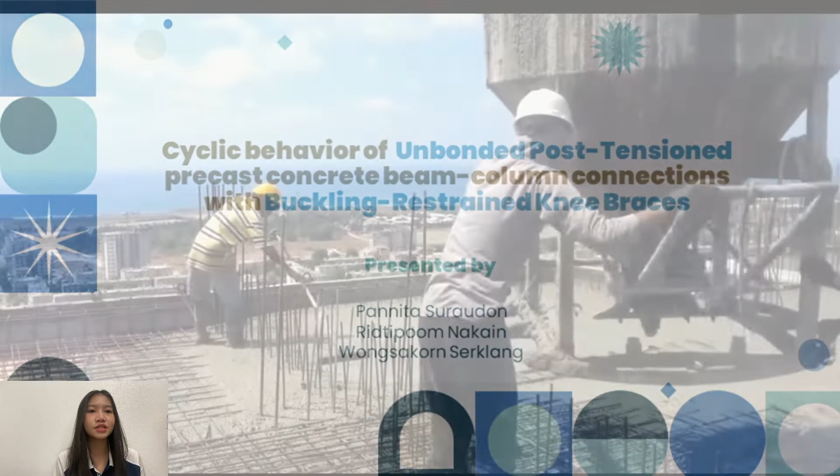In the past, most construction used cast-in-place concrete, which had problems in quality, time, and used a lot of formwork. Precast concrete can solve the problems of cast-in-place in terms of great quality and faster construction. However, precast concrete is not suitable for earthquakes due to the weak joint.

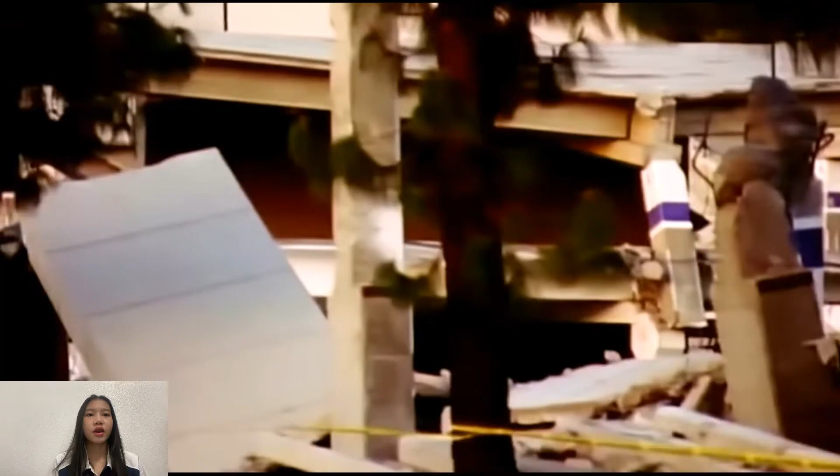According to the 1994 Northridge earthquake, most precast concrete structures collapsed. Therefore, precast structures would not be allowed unless the performance is proved and verified.

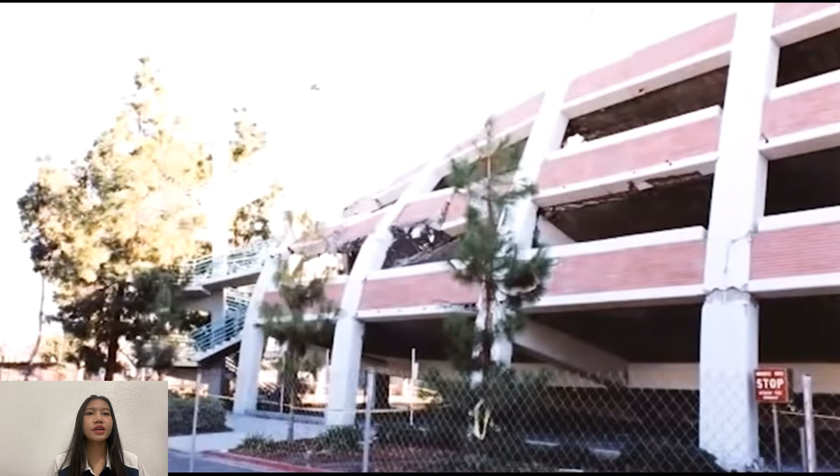After that, researchers studied and improved the joint of precast systems, which can be divided into main systems. First is monolithic, which attempts to emulate cast-in-place structure by casting concrete at the joint, which can dissipate energy well but causes crack or failure in the connection.

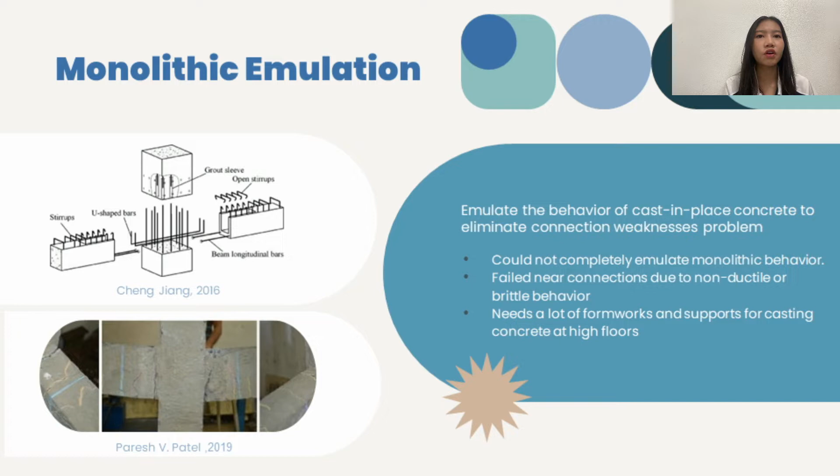To avoid damage of beam column connection, jointed precast is developed, which can limit damage to the contact area of the prefabricated part. Therefore, hybrid frame will be used in this study that has pre-stressed tendon to help self-centering, moment resistance, and shear resistance, combined with mild steel reinforcement which helps energy dissipation.

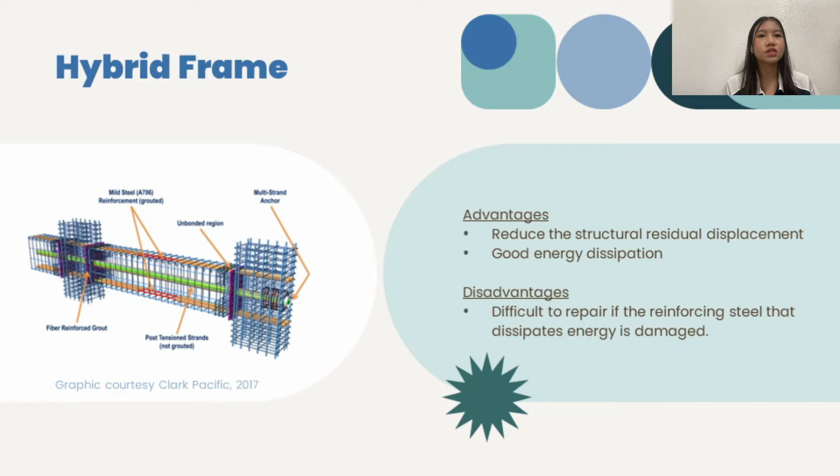However, after an earthquake occurs, the reinforcement is damaged and hard to repair. Therefore, to replace and repair easily, our study will convert the energy dissipator by changing internal reinforcement into external bracing.

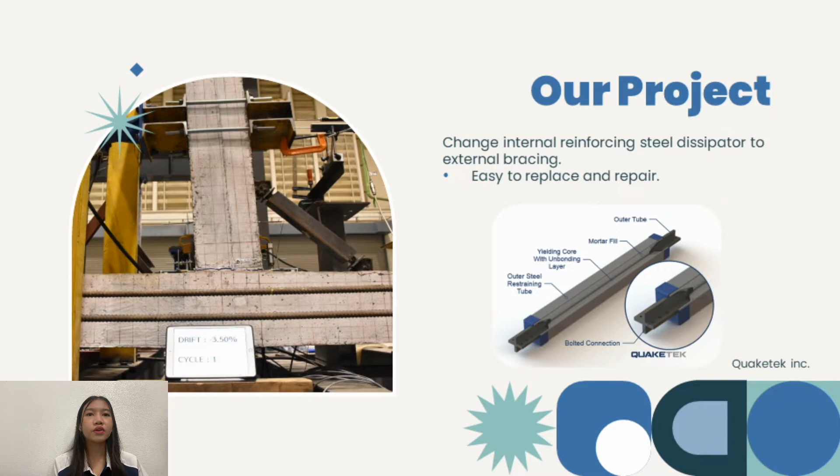Using buckling restrained brace, or BRB, to dissipate energy, the steel core can prevent buckling. Moreover, unbond material that wraps around the steel core can resist tensile and compressive force.

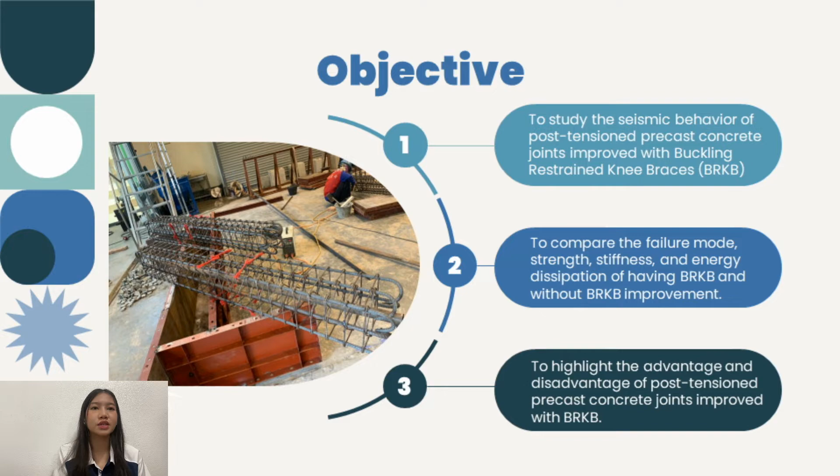This study has the objective to study the seismic behavior of post-tension precast concrete joint improved with buckling restrained knee brace, or BRKB. Second, to compare the failure mode, strength, stiffness, and energy dissipation of having BRB and without BRB improvement. Lastly, to highlight the advantages and disadvantages of post-tension precast concrete joint improved with BRB.

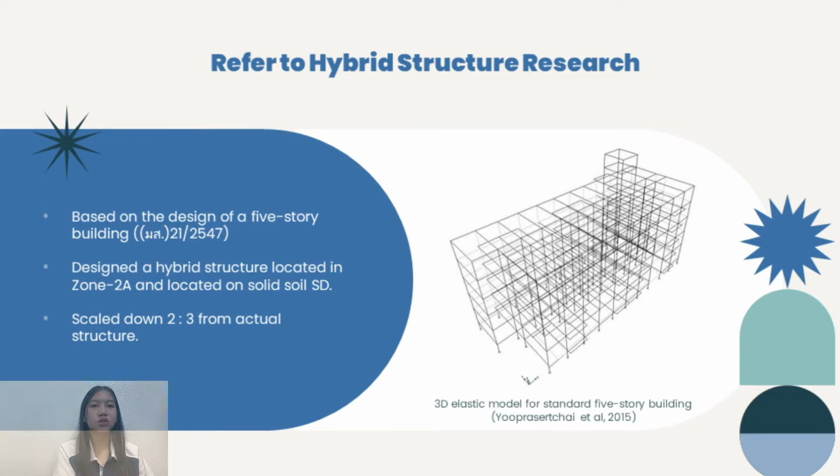Our study is based on the design of a 5-story building in hybrid structure, scaled down to two-thirds from the actual structure. Next is the design concept, designing hysteretic behavior of post-tension tendon for self-centering, as shown in the bilinear elastic graph.

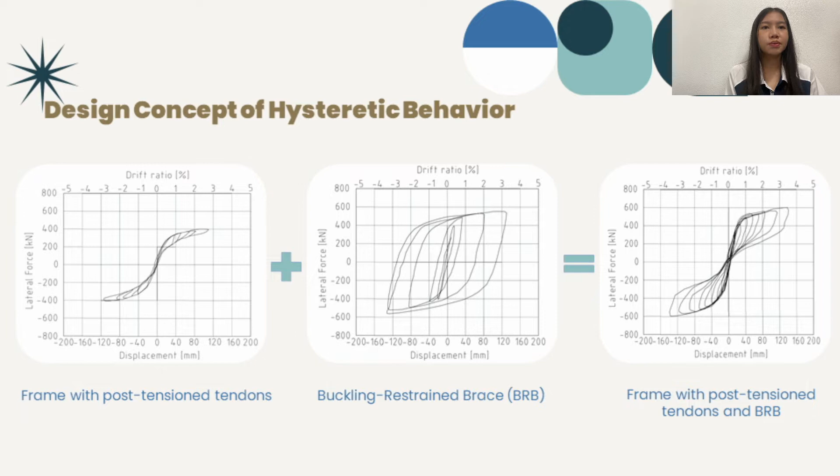Design of BRB to dissipate energy is shown as fat loops, and the combination of post-tension and BRB shows flag-shaped hysteretic loops that perform the best seismic performance.

We design the structure using capacity design. First, the flexural strength at the hybrid connection must be large enough to withstand lateral forces from the earthquake. Second, the rotational resistance capability of the hybrid connection must be sufficient.

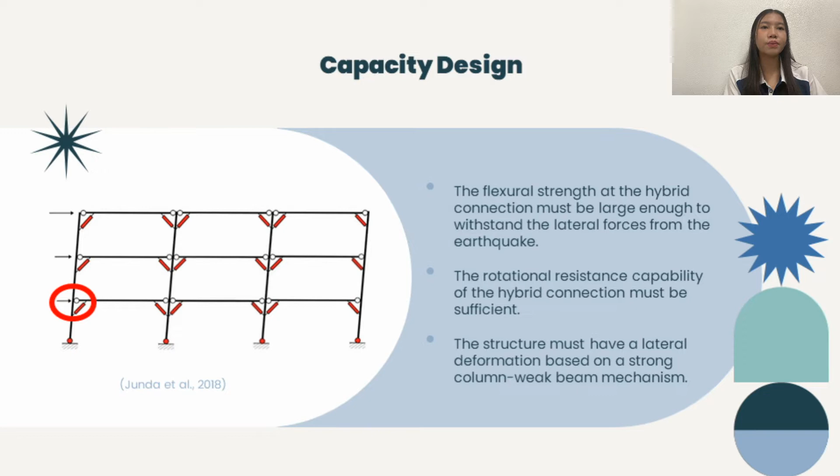Lastly, the structure must have lateral deformation based on a strong column weak beam mechanism. After that, the prestressed tendon should be designed in the elastic zone for self-centering even with no lateral load. The prestressed tendon will be designed to be capable of shear force and factored load.

Our study places the prestressed tendon at the top and bottom to increase moment arm, which increases flexural strength of the structure, while designing BRB at a point in the inelastic zone to dissipate energy.

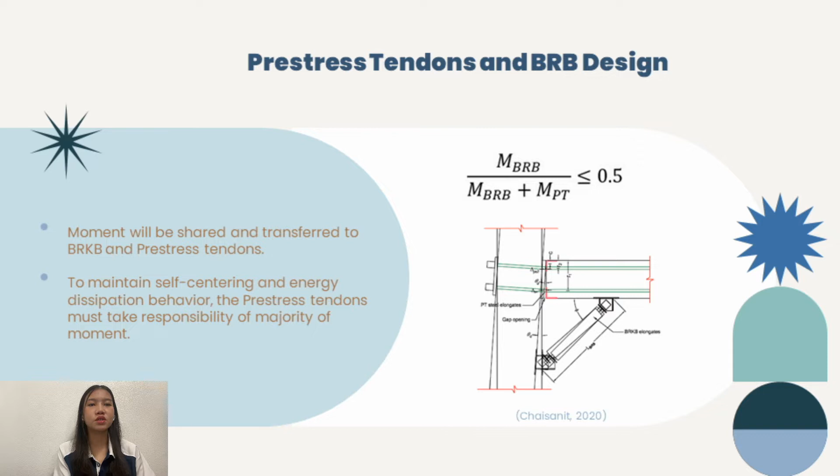The moment will be shared and transferred to BRB and prestressed tendon. Using the moment of BRB divided by total moment of BRB and prestressed tendon, this ratio must equal or be lower than 0.5 to ensure self-centering and energy dissipation, with the suitable value being equal to 0.3.

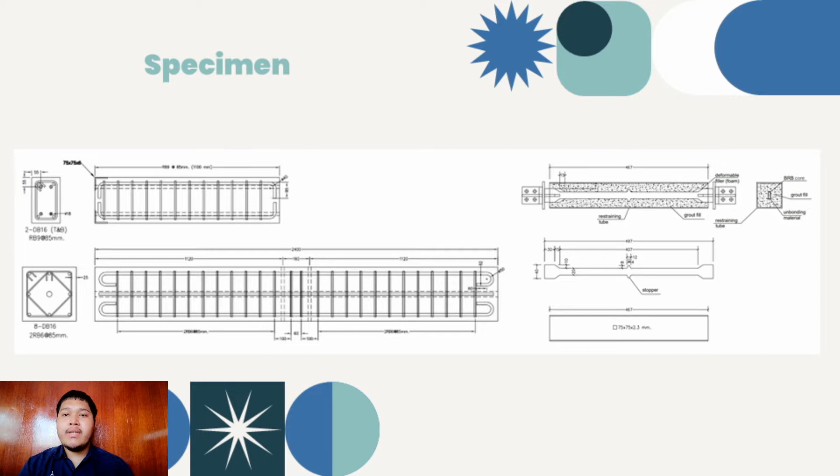For methodology, we make specimens by cutting the external joint section of the real structure we observed and scaling it down to two-thirds. There are three important parts, including the beam, column, and bracing BRB.

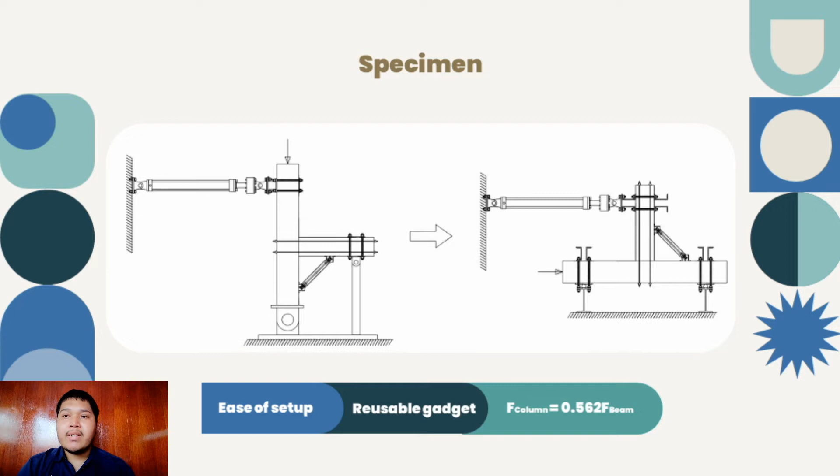The column force will equal the beam force multiplied by a factor of 0.562. For our experiment, we will compare between two specimens.

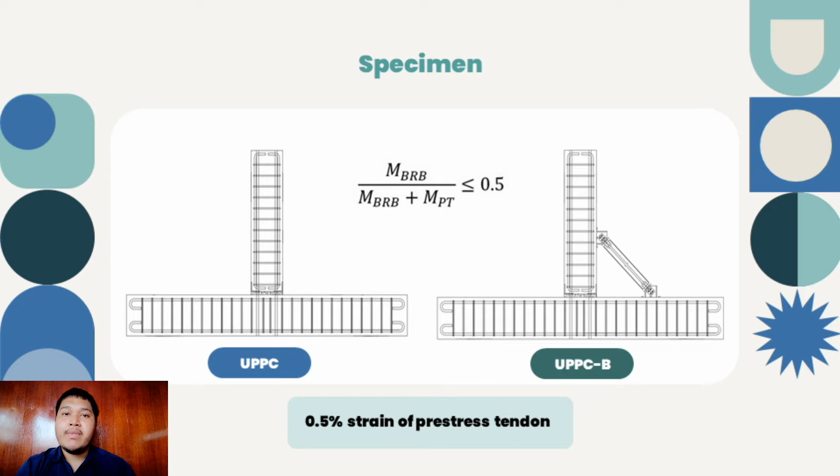It has the same detail as UPPC, but with added bracing BRB, and the tendons are put with a force of 0.5% strain, and the BRB moment over total moment will equal 0.5.

After completing the experimental design, the samples were installed in preparation for the test, setting it up with pivotal load by hydraulic jack at the end of the column, with a steel frame to prevent torsion on the beam.

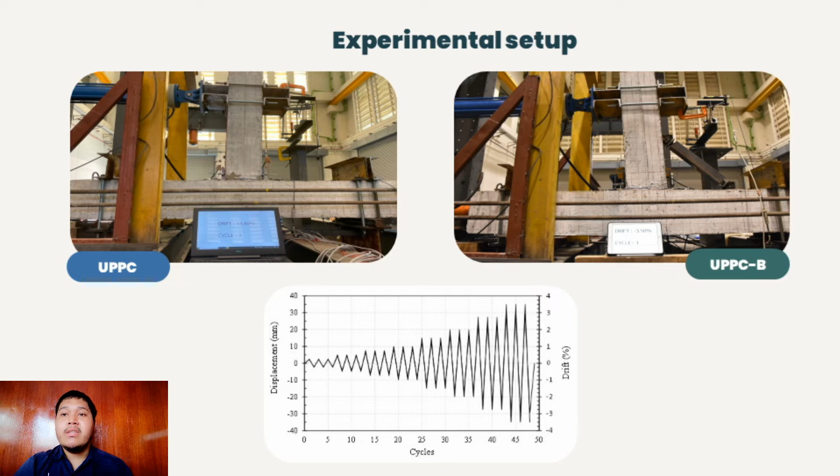Start testing by applying load at various story drifts, from 0.25% both forward and backward for 3 cycles, gradually increasing to 3.5% for 3 cycles, the same for every story drift and every specimen.

For the result of this experiment, first consider the hysteretic graph of both specimens. UPPC will show the advantage of self-centering when receiving cyclic load, and UPPC-B will show the advantage of good energy dissipation more than the other specimen.

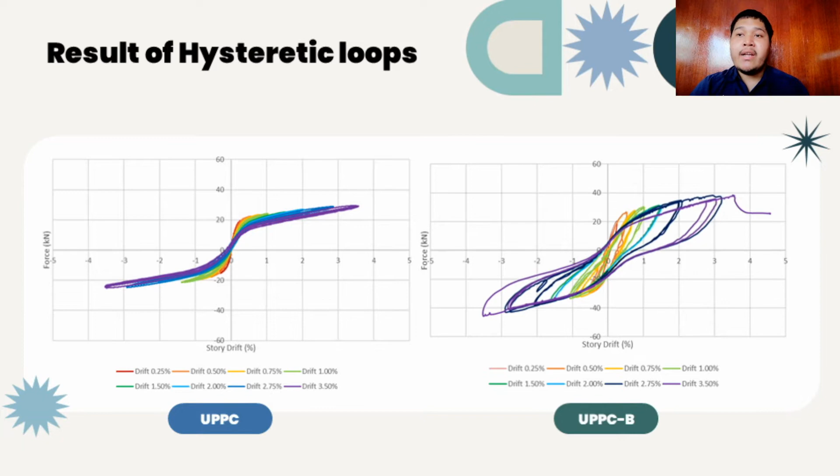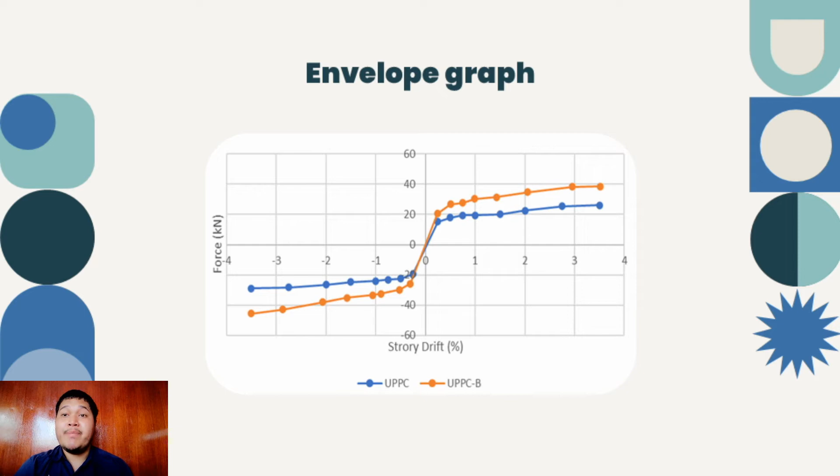Next is the envelope graph, which shows the maximum force of the two specimens and compares them. You will see at the same story drift UPPC-B can get more force, and the UPPC-B graph had a slope greater than the UPPC specimen, representing greater stiffness.

For the criteria used to ensure the performance of the frame, specimen UPPC was used as acceptance criteria for moment frames, ACI 374.1, which uses the parameters shown in the slide. When calculating the limit on real drift ratio, the value is 3.6%, so 3.5% was selected to compare to the acceptance criteria.

For specimen UPPC-B, the design of BRB is not yet governed by any building code, so the design to test the frame with BRB was based on the recommended provisions published in FEMA 450, which was used as a reference in this study, using a design story drift of 2%.

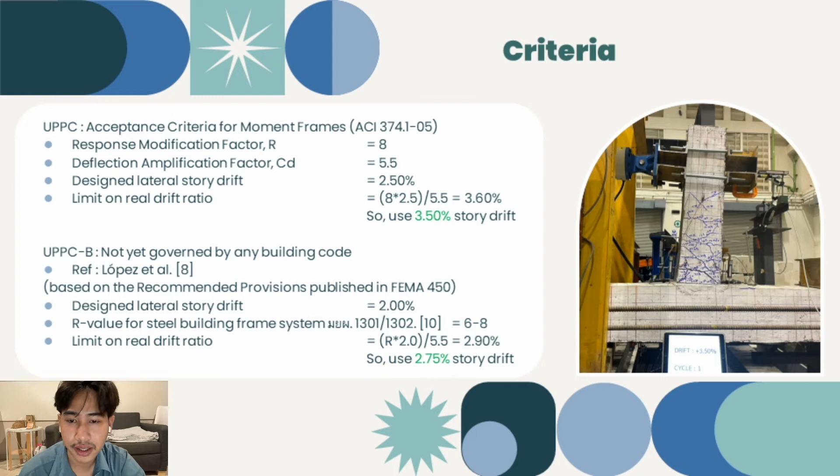When calculating the limit on real drift ratio using the R value between 6 and 8, referring to the มยผ. standard for steel building frame systems, the value is in the range of 2.18% to 2.9%. So 2.75% drift is the reasonable value to compare to the acceptance criteria.

This line graph shows the stiffness degradation for both specimens. The normalized secant stiffness is used to compare to the acceptance criteria, which states that the normalized secant stiffness shall not be less than 5%.

For the specimen UPPC, or the specimen without BRB, the normalized secant stiffness at the 3.5% story drift was 25.6%, while the specimen UPPC-B was 18.8% at 2.75% drift. It means that both specimens perform acceptable stiffness degradation.

Although the specimen UPPC performed a better ability to withstand the degradation of stiffness than specimen UPPC-B, the energy dissipation also needs to be confirmed in order to ensure the performance of seismic resistance.

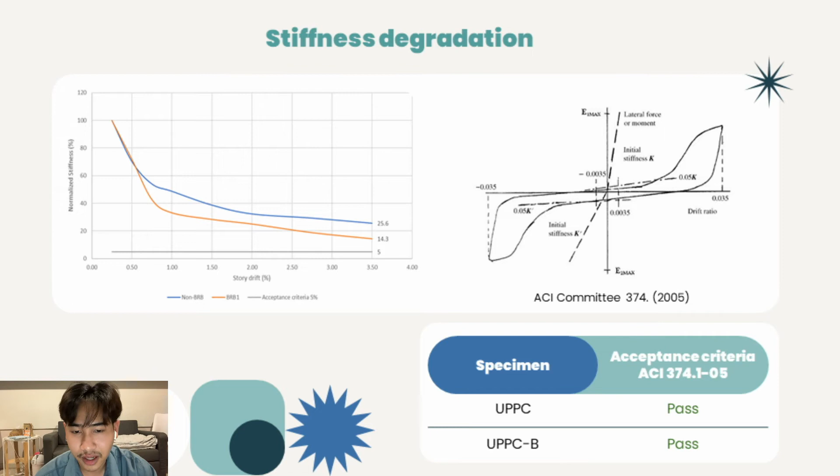For the energy dissipation, in order to check whether the behavior of energy dissipation for both specimens will pass the acceptance criteria or not, the relative energy dissipation ratio was calculated and plotted.

The relative energy dissipation ratio has to perform above 12.5% according to the acceptance criteria, but specimen UPPC was only 2.25%, while specimen UPPC-B performed 21.6%. It is clearly shown that the energy dissipation behavior of specimen UPPC did not satisfy the acceptance criteria, while specimen UPPC-B was satisfied.

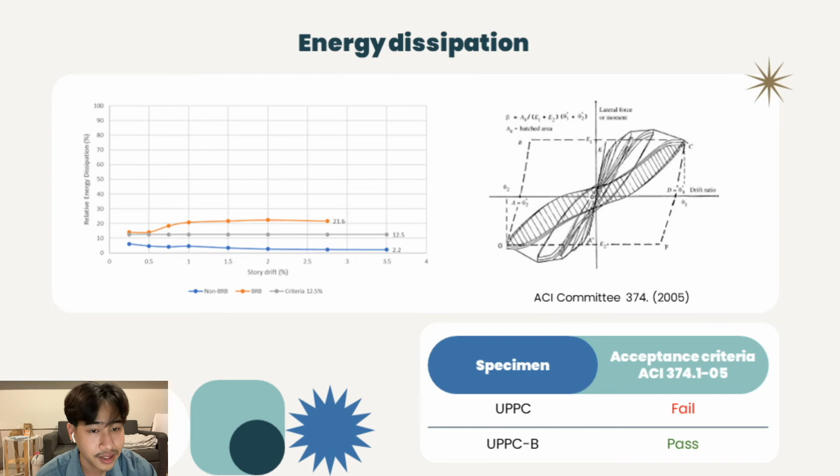Next is to ensure that the experimental results are following the assumptions or not. The first assumption says that the connection deforms as rigid bodies, or deforms only at the beam column interface.

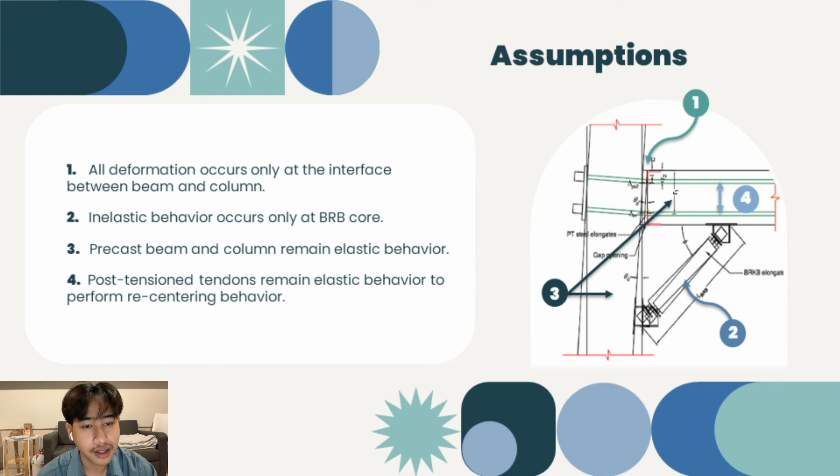Second is that the inelastic behavior occurs only at the BRB core, which means that the precast beam and column, including post-tension tendons, should remain elastic behavior, shown in numbers 3 and 4.

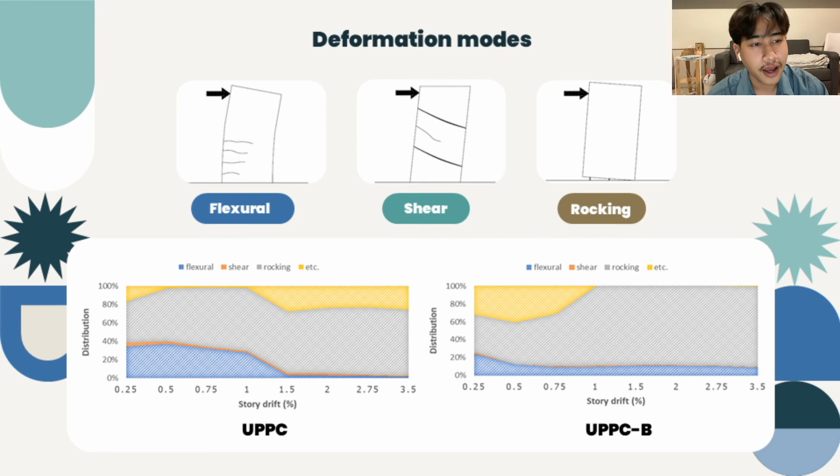In this study, 3 major types of deformation were measured for both specimens, consisting of flexural, shear, and rocking deformation. In comparison of both specimens, it was found that the flexural beam rotation and joint shear deformation did not play a significant role compared to the rocking angle deformation, shown in the gray area. The important deformation was observed at the beam column interface, which deformed like a rigid body as expected.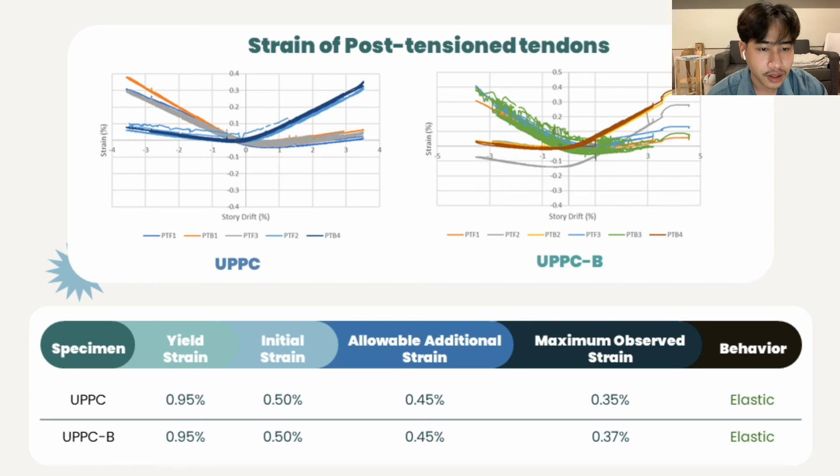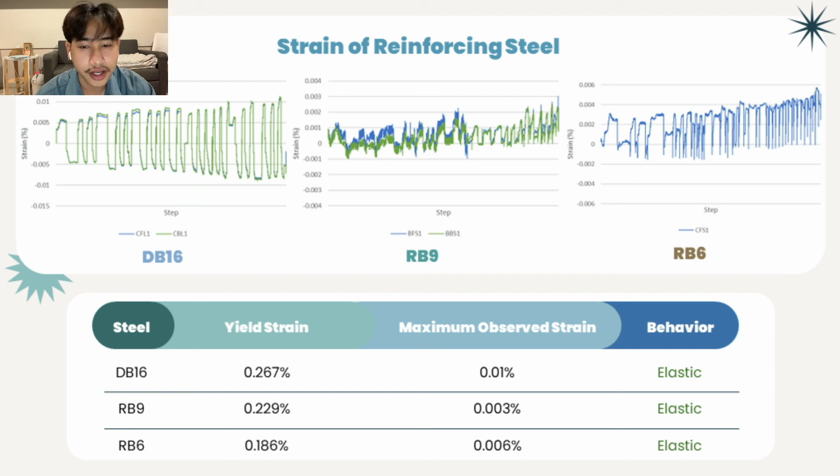The last one is the strain of reinforcing steel. Both specimens contained 3 sizes of steel, which are DB16, RB9, and RB6. From the results, it can be seen that the strain of reinforcing steel for all 3 sizes was significantly lower than the yield strain, which means that the reinforcing steels can totally remain elastic behavior as expected.

It can be concluded that the post-tension precast concrete connection with BRB can perform higher strength, stiffness, and energy dissipation than the frame without BRB. This alternative frame system can also limit the damage only at the beam column interface, and no damage was observed at the precast beam or column, which makes it easier to repair after being subjected to seismic load.